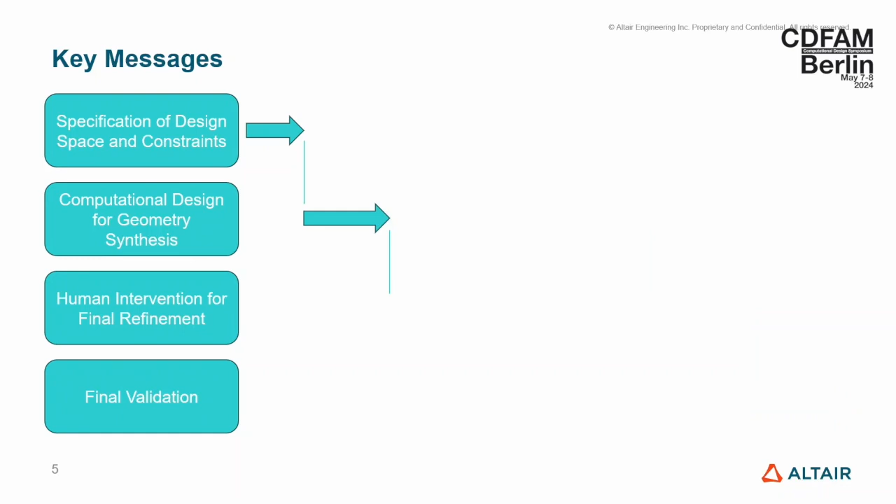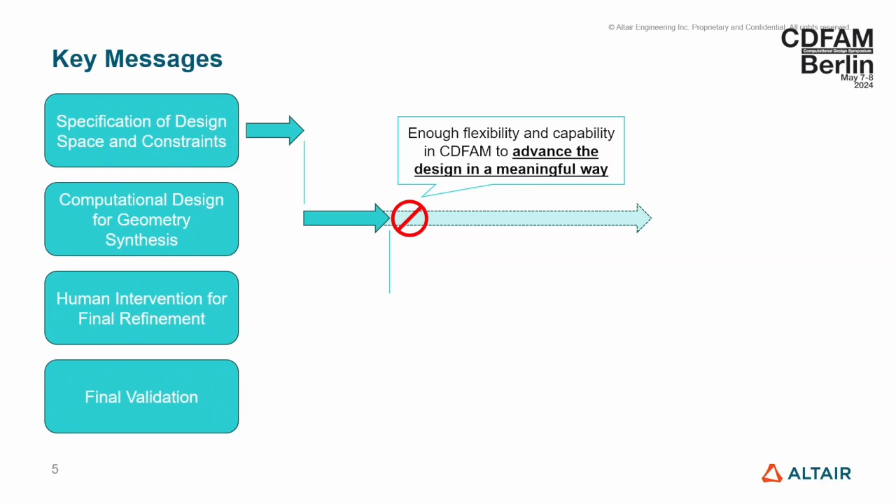However, things aren't always this great. If we don't have enough flexibility and or capability in the computational design part of the workflow, then we don't really advance the design in a meaningful way towards completion. And this can be a real blocker. The knock-on effect of this is we leave an awful lot to do in recovering that geometry to get it to the point where it is manufacturable.

We can encounter another block here, especially if we've leaned too heavily on computational design and we haven't thought about providing those tools that actually get you to the finish line of a manufacturable component. Now, if you don't have the tools to dig yourself out of this hole, you are ultimately stuck. And when you're stuck, the likely knock-on effect is that you need to bring in other software, other capabilities to get yourself out of that problem.

And so ultimately, what we want to make sure we're not doing is taking freedom of expression away from the human designer, and we definitely don't want to get them stuck because we've encouraged them down an incomplete workflow that's heavily leveraging computational design. So again, at a very high level, we don't want to have this hidden cost to our customers and users where they're not just buying one piece of software, they're actually having to buy all the other things that help them get to a completed design.

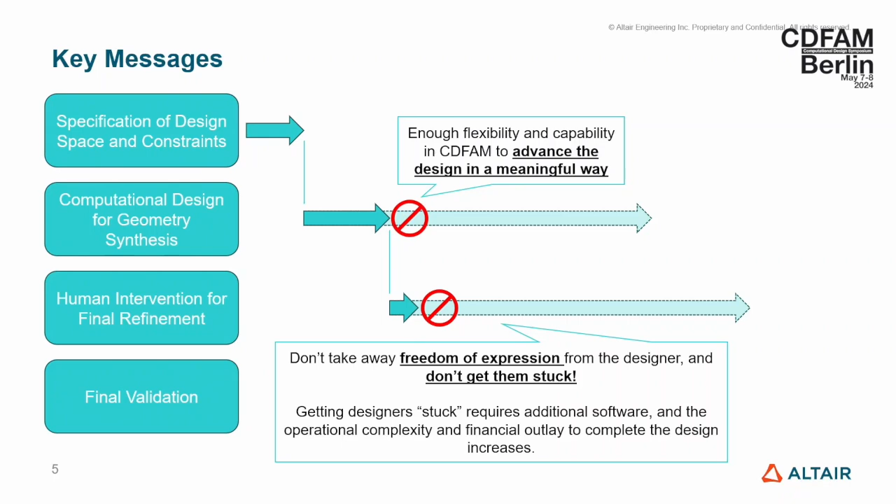So ultimately, this is my personal view, I think it's about balance. We absolutely want to leverage the computer to the greatest extent possible. We can have automation, and through automation we can have speed. If we have speed, then we have more time for exploration, and overall I would say that's a very good thing. However, this needs to be traded off with making sure that overall oversight is still in the hands of the human designer. They're able to operate flexibly alongside the computational design.

And something that humans are still particularly good at, as opposed to machines, is interpretation. So where is that design going? I can see it's trying to do this, but it didn't quite get there. Filling in those blanks that bring you to a complete design when you have possibly 95% of what looks like a complete design. And we want the human to feel like they can be expressive, and ultimately they need to have that control on that final refinement.

So what I'm going to do is just give you some example workflows from Altair Inspire. And what I'd encourage you to think about as we go through this is not just what's happening on the screen, but the way in which we're trying to design our tools to allow the user to operate flexibly and be expressive, whilst also leveraging the power of the computer for computational design.

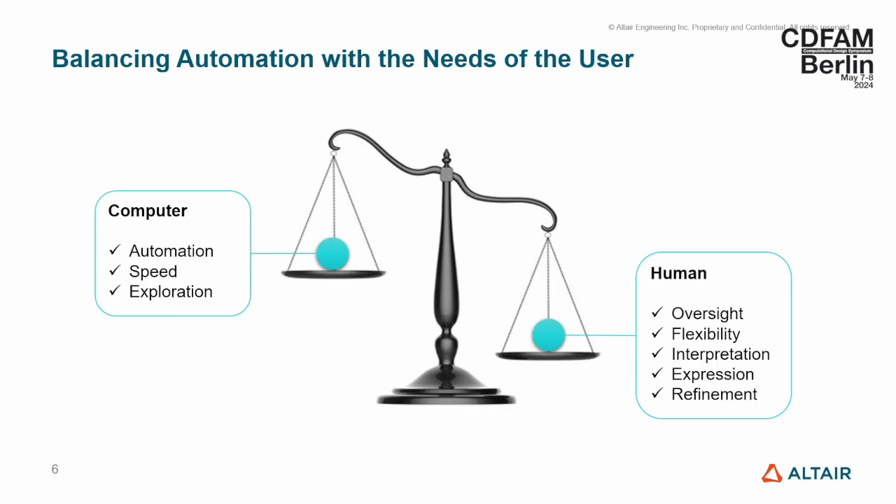So the first of these comes from the field of stochastic lattice design. These are particularly popular in, for example, biomedical applications where, yes, there are structural load cases to consider, but also things like biocompatibility inside the body, tissue ingrowth, and things like that for medical implants. I'm going to show a video and talk over what's happening here. So we start the design with a 3MF file, which we've imported here, of part of a human bone.

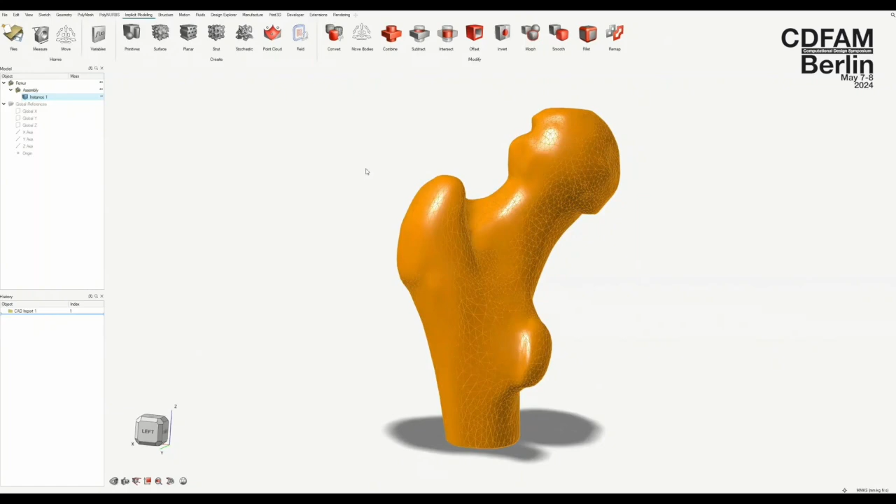This is a femur in this case. I will say I'm not an implant designer. This is illustrative. So we can optionally convert this into a subdivision surface, which makes it editable CAD, but you absolutely don't have to. And then from here, we're going to go into the implicit modeling capability of Altair Inspire and click the stochastic lattice panel.

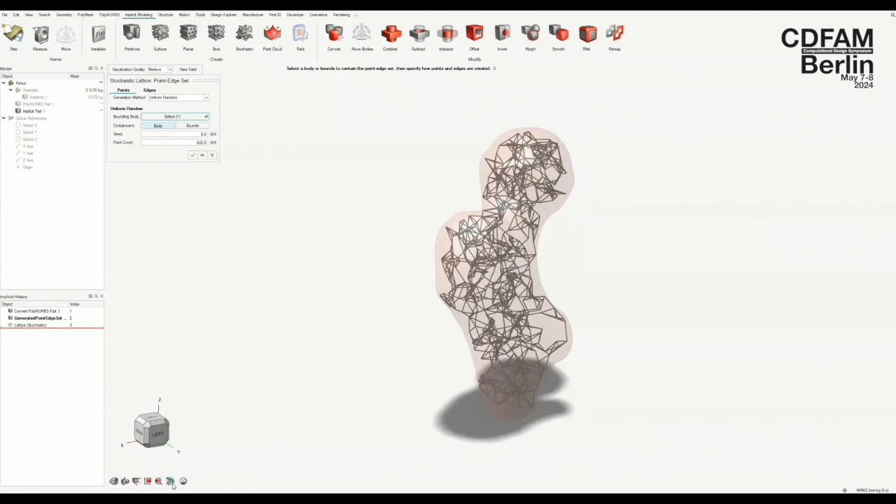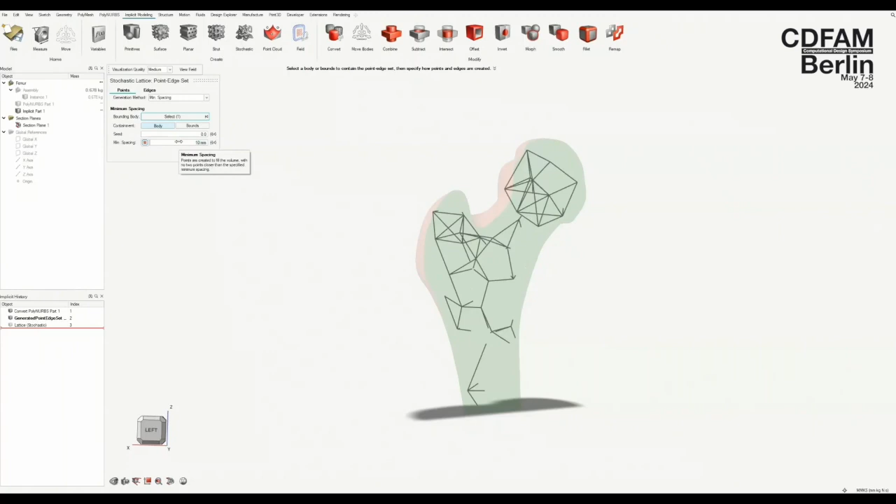So the thing that pops up automatically is actually a load of points that have been distributed according to a rule, and those points are connected by edges, again, according to a rule. So we can edit the way the points are distributed and the number of those points. We can have them randomly distributed or with a minimum degree of separation between them. And then we have different rules for how those are connected as well. So we're just going through different densities of points here. And you can see that filling out the inside of the model.

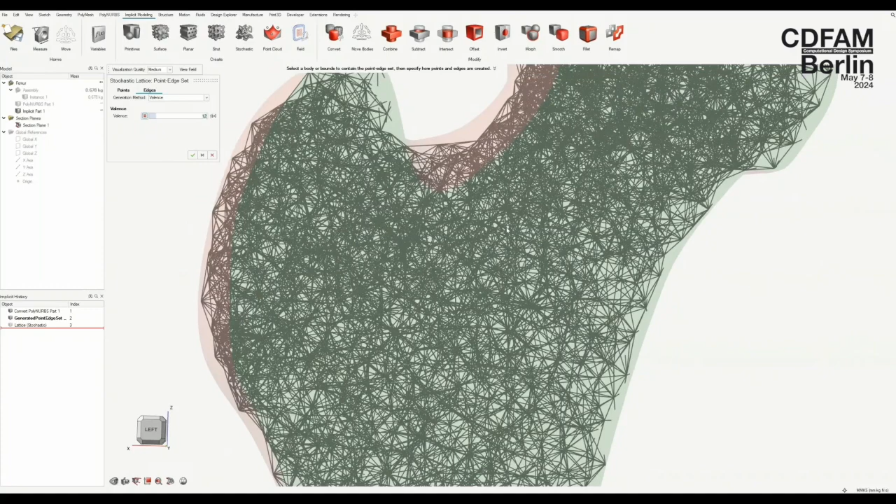And then when it comes to the edges, we can do that by how many of the nearest neighbors you want to connect each point to. Or you can do it by other means, such as the Delaunay triangulation, which gives you quite nice elements throughout the model. Now you'll see that also produces beams that travel outside of the geometry. And what I'm going to tell you now is that's okay, because what we do next is offer all of that freedom back to the user to produce precisely what they want.

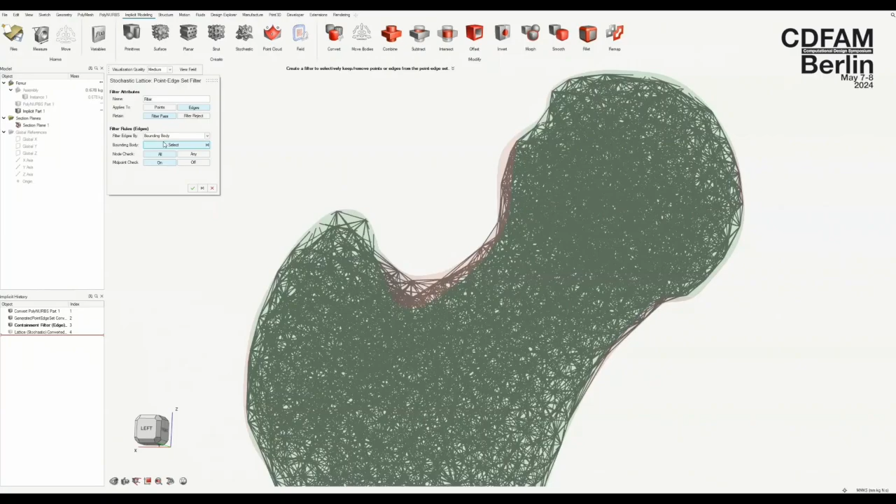And we call these point edge set filters. So we have points and edges that form a point edge set. And then we have filters that you can keep layering on top to decide which points and which edges are included. So by using a bounding body filter, we can remove any of those edges that were traveling externally to the model. And then we can see, as we keep hitting the plus button, we're adding more and more filters. The order of these filters is significant, and you can change the order, and you can tune each of the parameters.

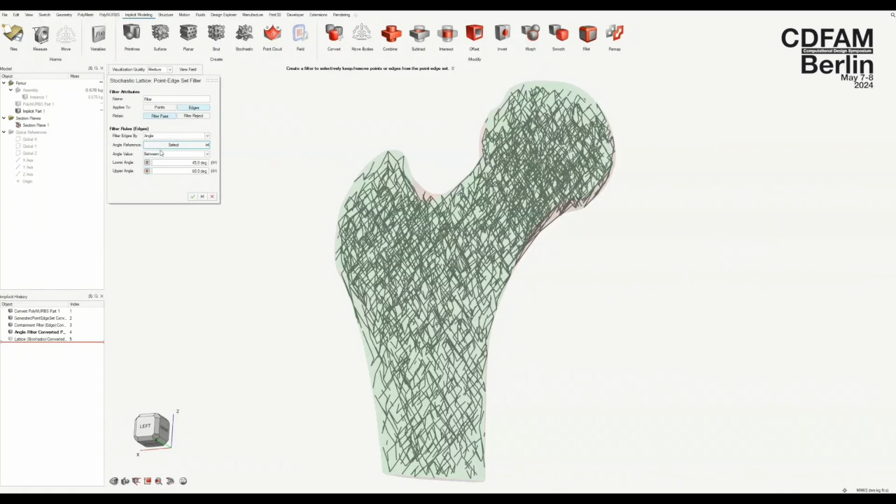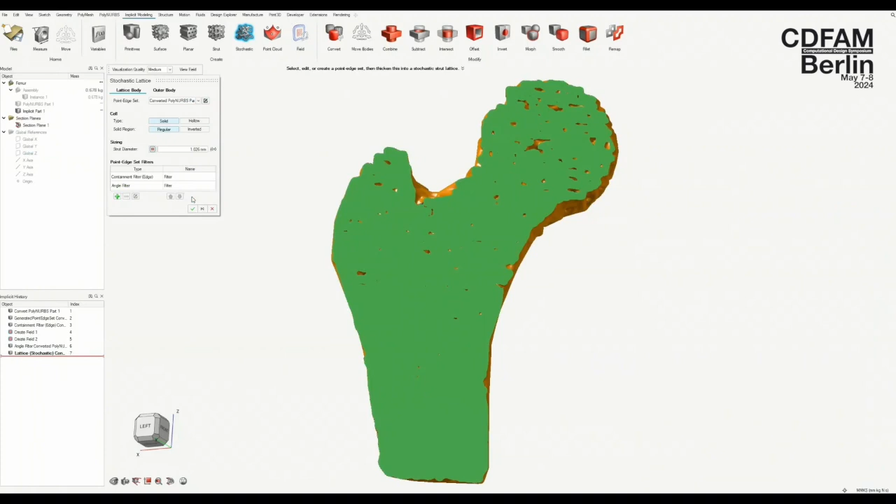So what we're doing here, to try and mimic some of what goes on inside the bone structure in a real human bone, is we're limiting the angle that some of these edges can form with respect to some reference. So as we go towards the bottom of the implant, they tend to be sort of 45 degrees to vertical. And as you move up towards the top of the implant, they tend to be predominantly horizontal or vertical and not much in between.

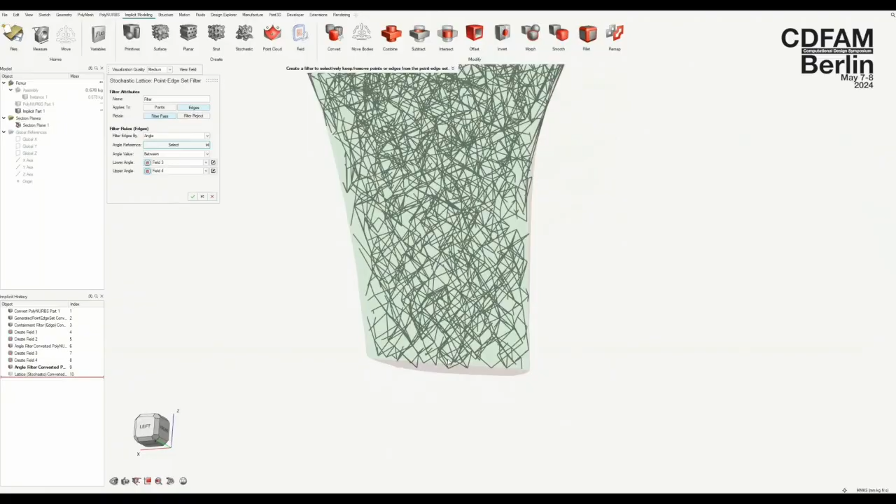Now we're doing that with what we and others call field-driven design. So what we're doing is saying, based on the height from the top to the bottom of the model, change the angle of the edges that you will permit to carry on existing in the part. And you can see as we scroll up a smooth transition between those effects. So with field-driven design, at every point in space, you can control a whole host of parameters in a way that you probably couldn't do before implicit modeling.

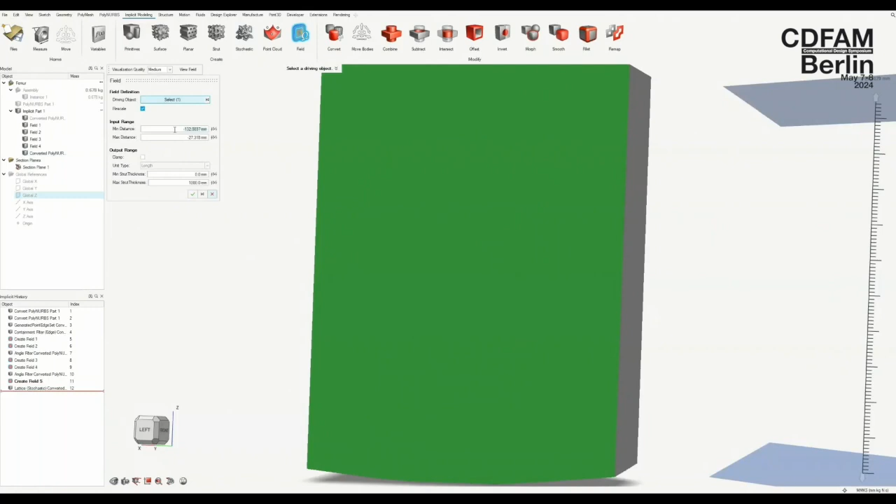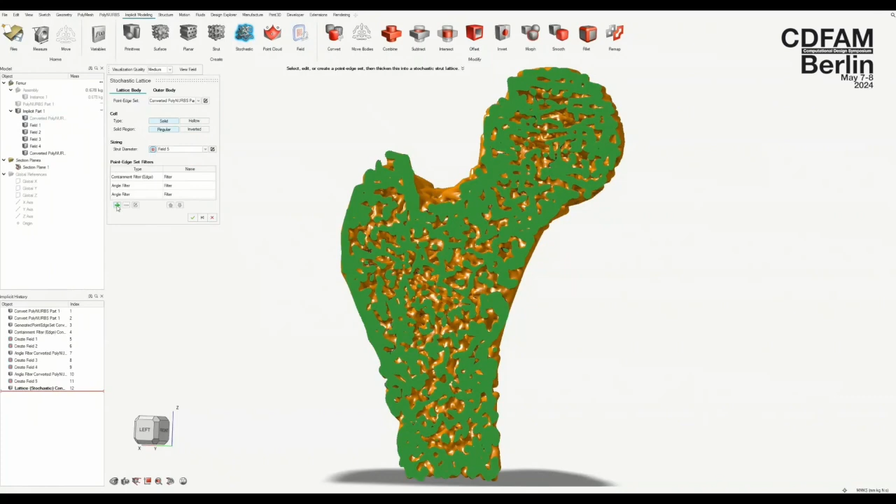What we do now is start thinking about thickening this into a lattice. It had infinitely thin edges before, so we're not unique in this. This is generally the approach taken. But we're also going to put a field-driven effect onto this. So as these beams get closer to the surface of the model, they get thicker, and as they move deeper into the model, they get thinner. So we create a field which represents the distance into the model, and we set the beam diameter according to the value of that field. And you can see that gradient now appearing there in this section view.

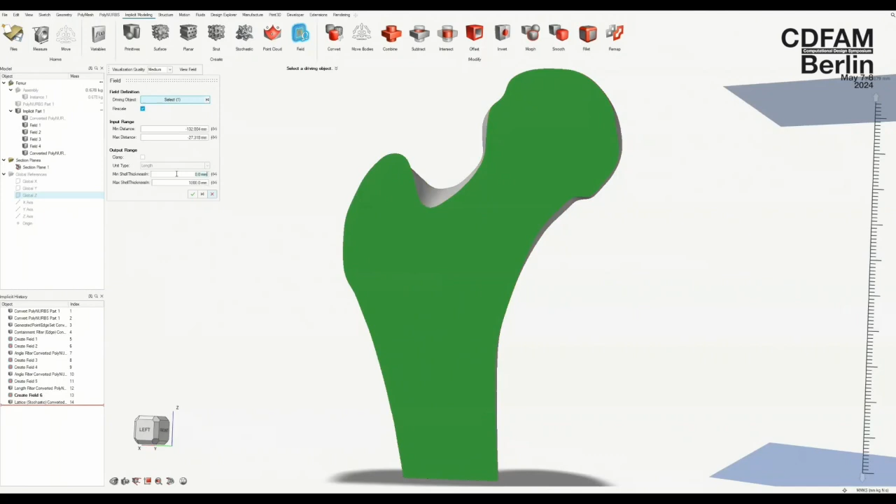We need an outer shell on this as well, which is something we can very straightforwardly add. And again, this doesn't have the same thickness. In fact, it changes all over the place in the model. Now, we can control this in lots of different ways, but for this video, we've just shown it controlled between two horizontal planes that you can see here. So you have a thicker shell thickness at the top, and that smoothly varies down to a thinner shell thickness at the bottom. And it's all completely interactive. You can do this with the mouse and keyboard.

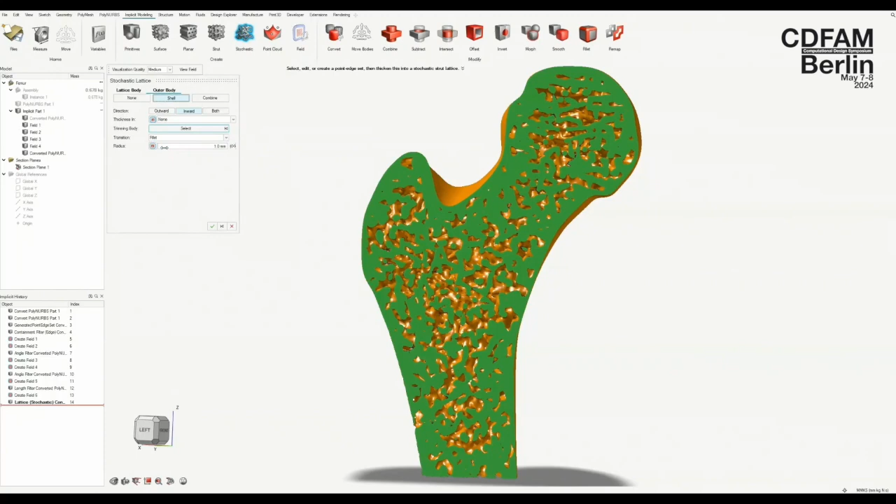And the point here is you keep layering these effects, much like editing digital photographs. I want it to be black and white. I want it to be a bit darker here. I want to change the focus level there. It's the same with the way we're working here. You keep layering your effects until you have precisely what you want.

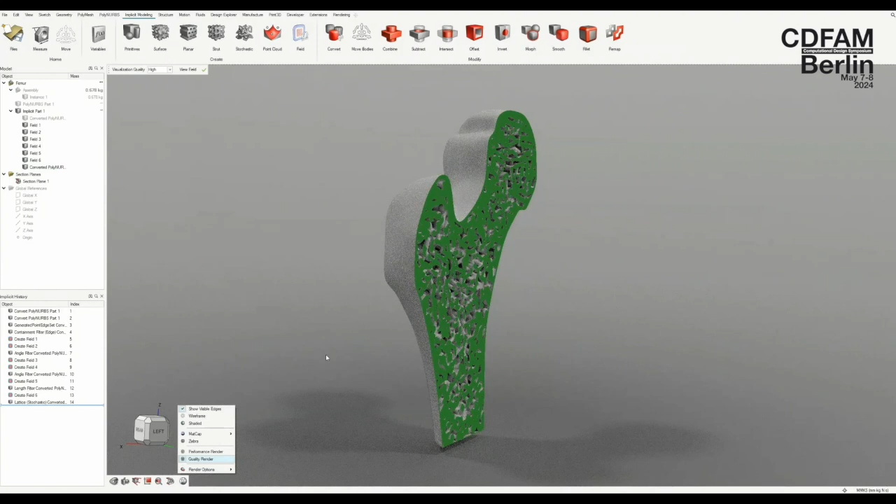Now, in the interest of time, I may skip to the end of this video, which shows this being passed directly into the Altair Inspire rendering scene, which is coupled very tightly with the geometry. We share memory, in fact, so we can render and design at the same time. It's very fast. But the end game is that you produce images that look like this, and this shows a section view of the implant.

So just to review that workflow, we have rules for distributing points, and there's lots of ways you can do that. We have rules for how you connect those points with edges, and then we're encouraging the user to layer these effects to retain exactly the edges and the points that they want. And then we can also have field-driven effects on wall thicknesses or lattice beam diameter, etc.

And there is really no limit to how much you can achieve when you approach it with this field-driven design approach. Fields can be driven from BREP features, from models as a whole, mesh geometry, subdivision surfaces, or even, and you'll see this later, point clouds, which is actually becoming very powerful. So

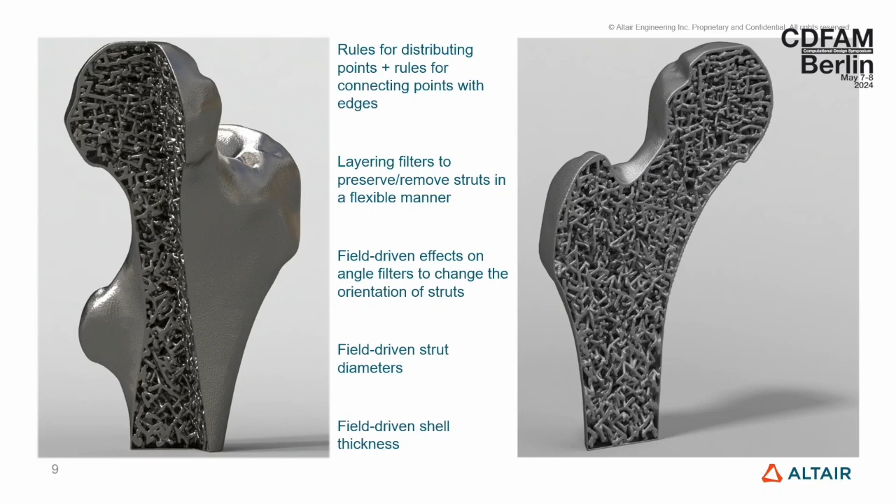that's how you can do it in the GUI, but sometimes we get really strange requests. We had an exploratory piece of work where someone wanted something that we hadn't really encountered before. They were talking about acetabular cups, and this is a sort of hip implant, if you haven't seen one of these before. And this lattice structure here is designed to encourage, again, tissue ingrowth so that the body accepts the implant. But they had some strange requirements.

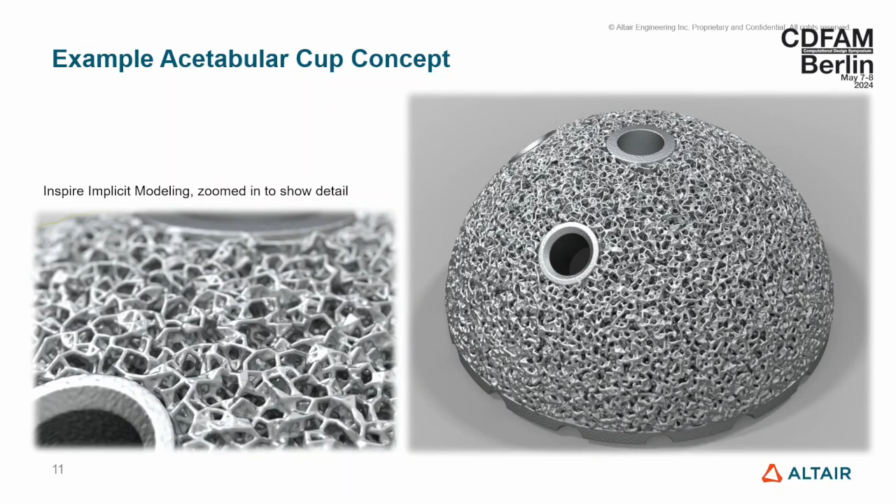Firstly, they wanted to generate these pretty much automatically. And they also wanted to drive it with parameters that made sense to their domain. And those things were things like pore size or open area of these sorts of pores available on the surface, the strut or beam thickness, and then the overall dimensions. That's all they wanted to work with. They don't have a deep personal relationship with a particular lattice type per se. They just want it to be a good implant. So they're kind of doing the inverse design in this case.

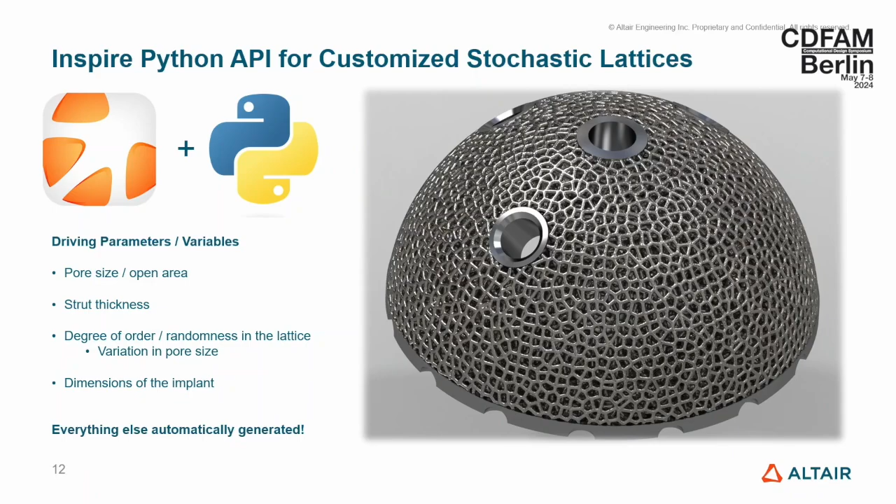And we're quite fortunate in Inspire in that we have a very comprehensive Python API. So when something isn't obviously possible with mouse clicks and keyboard entry, it can be scripted just with normal Python code. Everything that's available in the user interface can be hooked into as a Python script. And the conversation was quite interesting. We had a discussion about whether we could control the degree of order or randomness in these lattices, and then have everything else generated automatically. And the answer is yes, you can.

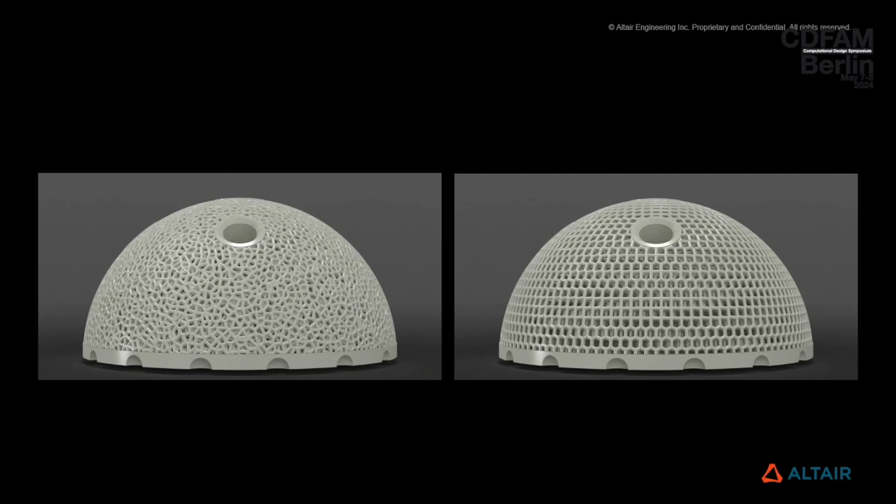So here are some examples where we're going from highly ordered to much more random, all run from the same script, and then we have different target pore sizes for these implants here. Again, all run from the same Python script. So yeah, having that scripting ability is really nice for getting that extra layer of flexibility for the user.

So I'm going to change tack now, and I'm going to talk about topology optimization. Altair is known for a few things, but it's definitely known for topology optimization. And across the product range, there's a wide range of solvers, and importantly, there's a wide range of manufacturing constraints and boundary conditions. And it's really critical if you're going to have a manufacturable design to be able to select the right solver, the right constraints.

Usually, we end up wrapping these in what we call PolyNURBS surfaces. This is a subdivision surface technology, and as the previous talk mentioned, it gives you editable CAD. It's not parametric CAD in the traditional sense, but it is editable CAD, and you'll see that in action in a minute. I'm going to show you some workflows where we use implicit modeling alongside a traditional topology optimization workflow in quite interesting ways.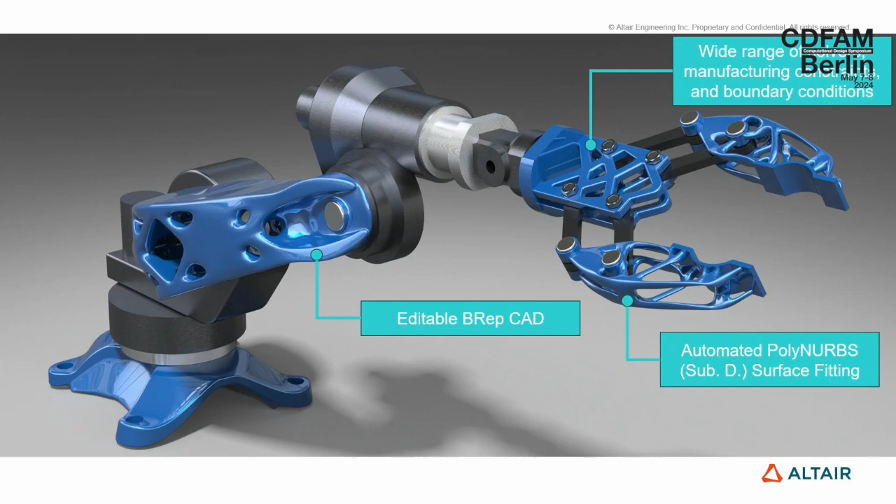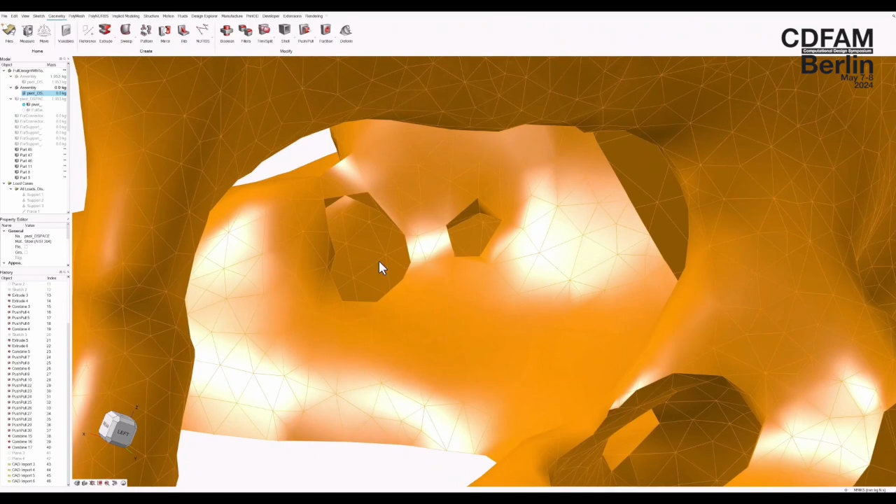And the theme here, as you'll see in this video, this is the original component. This has actually come from outside of Altair. We're working with some of the geometry here. And this is a fairly degenerate topology optimization case. It's done reasonably well. You can see the features emerging, but there are certainly some things that we'd like to improve there. You can see these pores have only just opened up. They should either be there meaningfully or they should probably not be there at all.

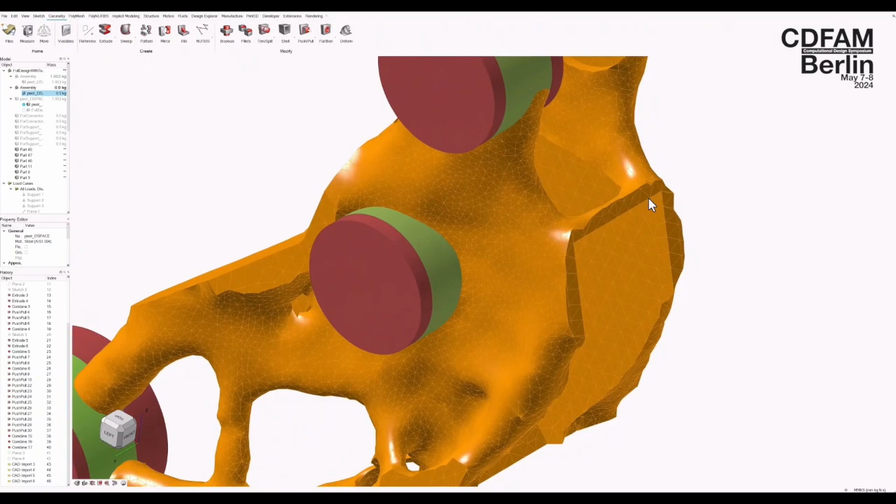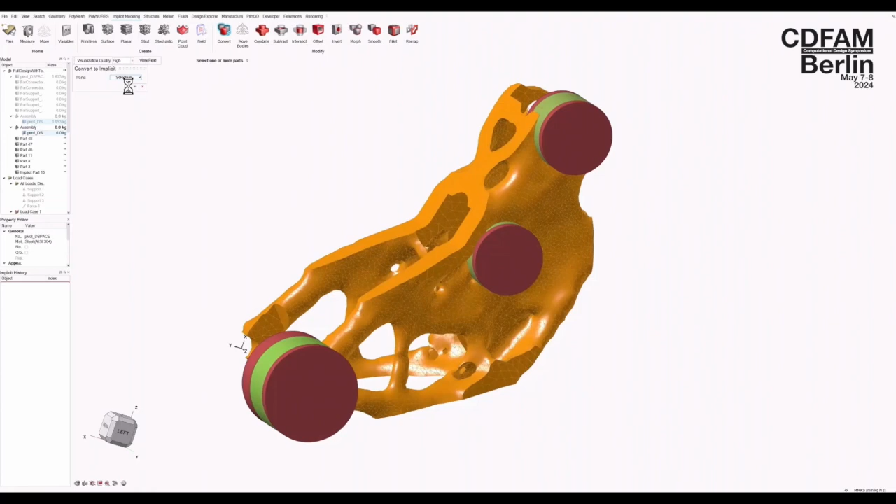Actually recovering this geometry, we call it geometry recovery, recovering this into a manufacturable model can be a bit of a painful process, but thankfully implicit modeling makes some of this a lot easier in my view. So what we're going to do is convert this mesh model into an implicit body. And that just takes a second. We select it from the model browser. And it's a little bit underwhelming at first because it looks more or less as it did before. The key difference is that it's now in an implicit format, and we can do different things with that.

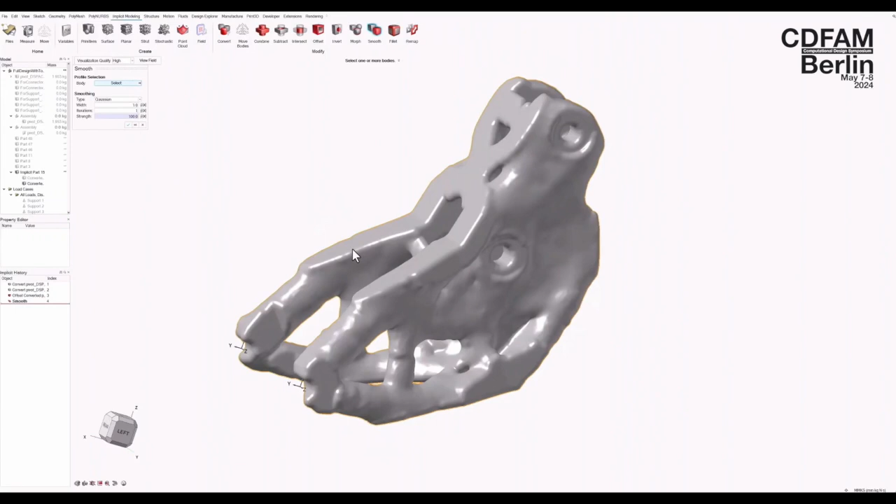As I mentioned before, this is the fast workflow that gets you something quite good quite quickly. We're going to apply a global offset to the model to build out thickness, making some of those very thin, almost degenerate members more reassuring. There's then the possibility to do all kinds of smoothing on that geometry very quickly in implicit modeling, because all of this is computed on the GPU. It's very fast, and you'll see this model turn into a much smoother version of itself.

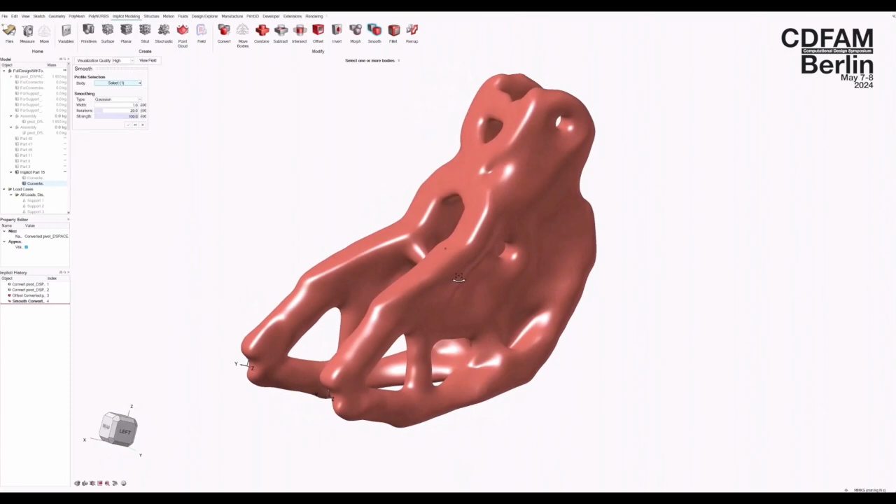To some people, this workflow is acceptable and it's all they want. I don't progress this all the way to the final model in the interest of time. The next example I show will go a lot further, but you could happily progress from this point out to the final model.

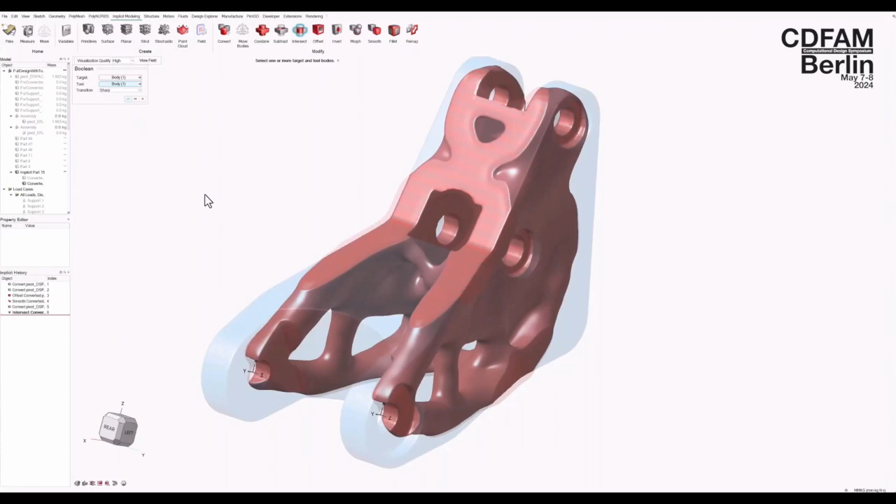I think the final step in this video is reintroducing some of the original keep geometry, the geometry that should be preserved, the bearing surfaces and mounting points, and also making sure no material is moving outside the volume of the original object. It all has to exist in that design space, so we need a nice hard trim so we don't get any unwanted collisions or interference.

I'm now going to show you another workflow, which is slower, I will grant you, but much more controlled. We're going to leverage point clouds, which is something we can use all over the product.

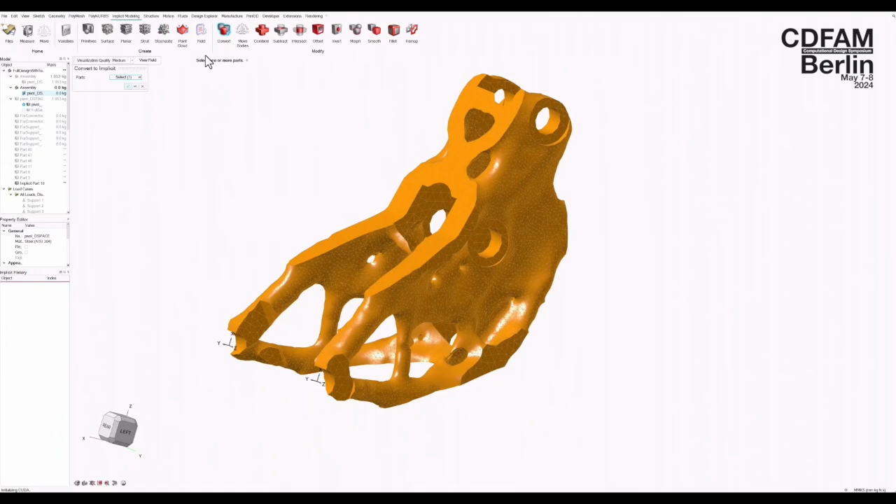So we'll start from a similar position, this is the same model. We're going to do two things: we're going to offset like before, but locally, based on an amount specified at each point in a point cloud. I'm creating the point cloud here so it exists at the right point in history. All of our implicit modeling is history-driven, so you can roll backwards and forwards in time. So we create the point cloud so it's available for use.

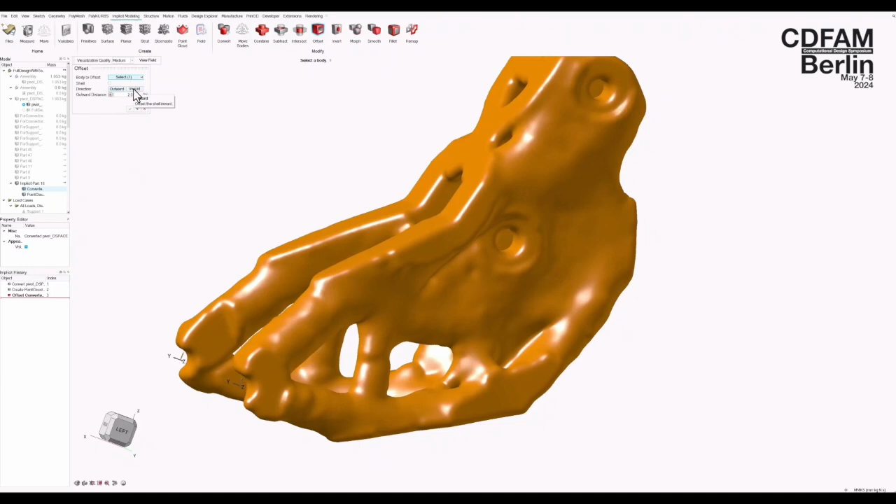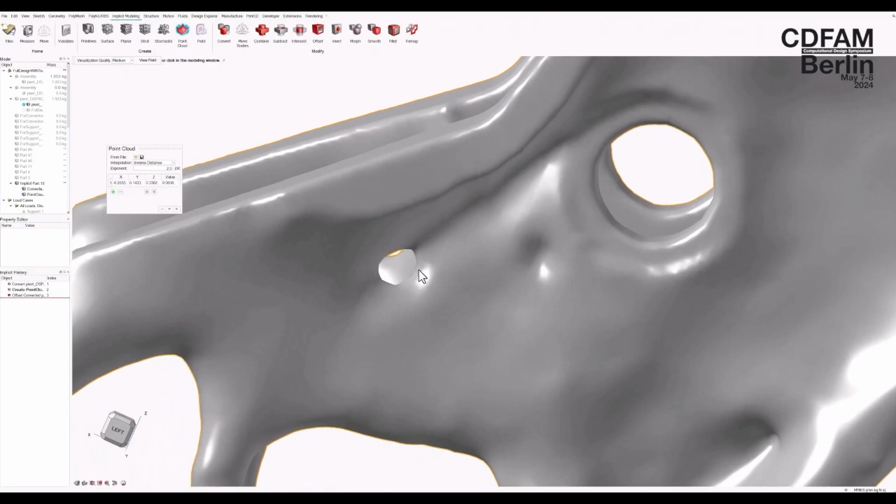I'm back in the offset tool here, and you can see there's no one good global offset value that suddenly makes this brilliant. What we want to do is locally determine where we're going to offset. What I'm really doing here is not trying to get the final design, but rebuild the topology so it exhibits all of the features in a more obvious way, and say yes, that is the topology I want, then we'll go further from there to move it towards a manufacturable geometry.

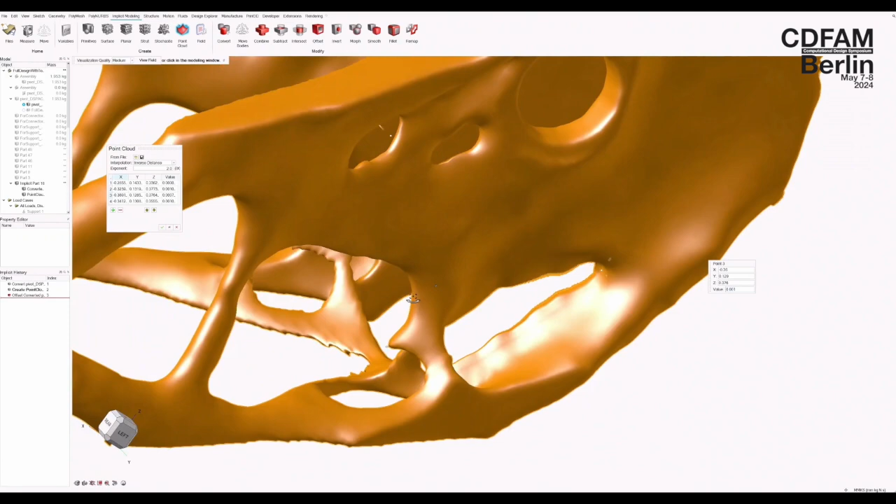I sped the video up a little here in the interest of time, but this is just me working in the software as is. As I place points, I'm also specifying how much I'd like to offset by in that location. Between points, it's interpolating that amount, and we have lots of different ways of interpolating. You can do it based on your nearest neighbor, or have smoother interpolations based on the distance to your nearest points and the influence each one would have.

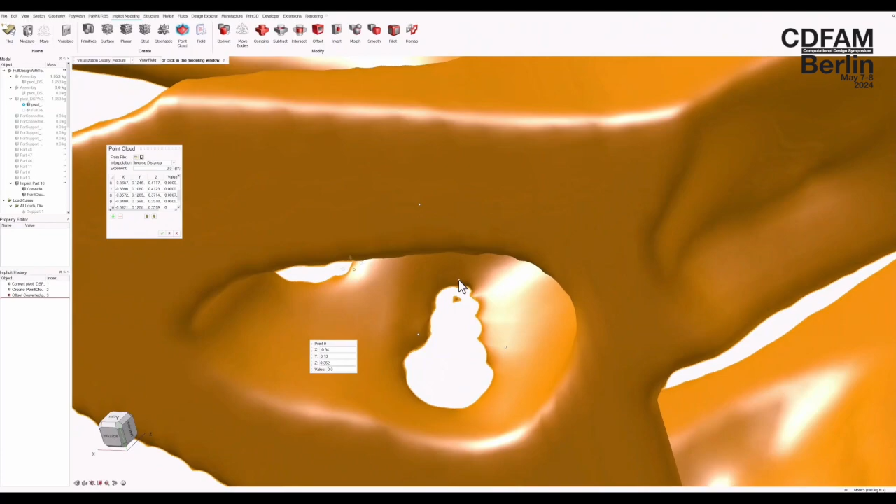After I've placed enough points to reconstruct the topology I'd like to proceed with, this is again focusing on the fact that geometry is often degenerate and you need to do something about it. You can see as I'm clicking through, I'm rebuilding this cross-brace member that became quite degenerate, making sure that pores don't close up.

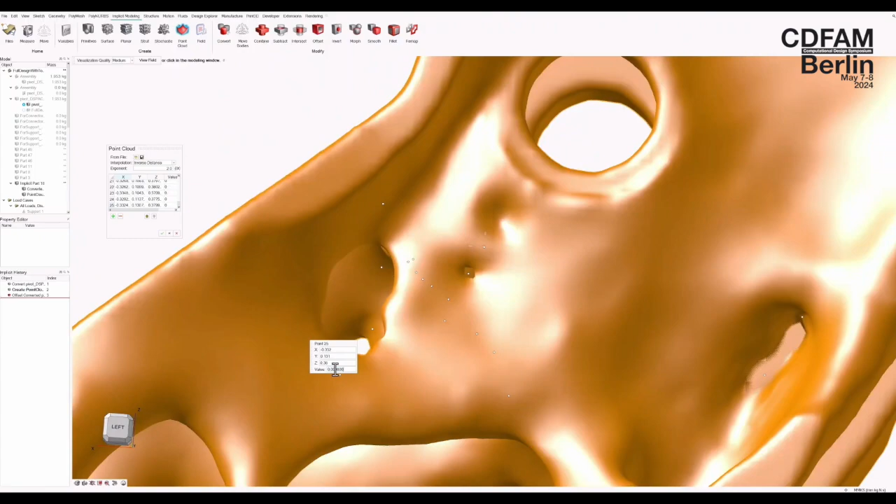As I complete this final cross-brace here, I've decided that's enough now. I've got the topology in a meaningful way, and now I'm going to move to a different tool, which is called Morph.

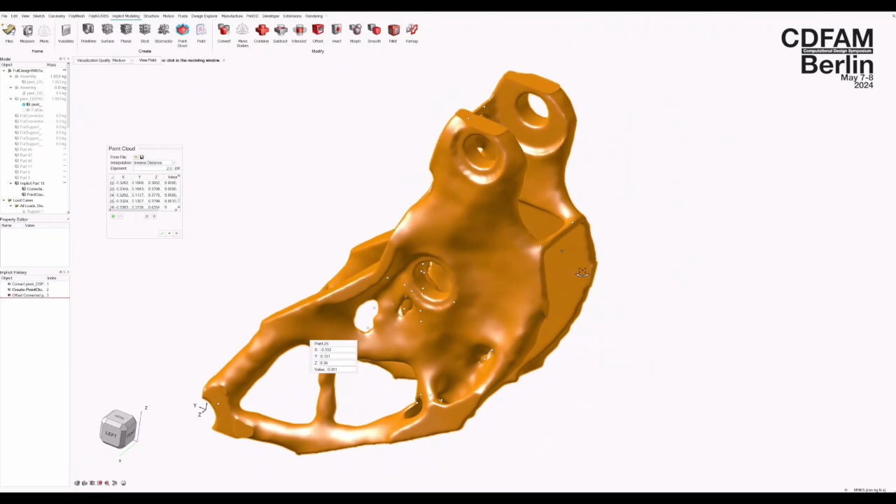Morph is an interpolation. So if you have shape A and shape B, it can give you some variation between those two things using 3D interpolation of the geometry, and that's something quite straightforward to do with implicit modeling.

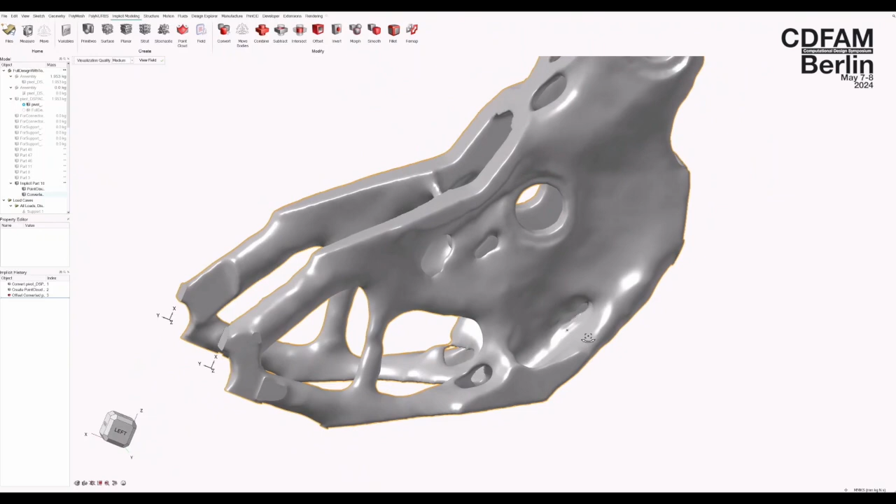But again, I'm going to morph locally. So as I put down points in a new point cloud, I'm saying whether I want it to be more like the original geometry, sharp features, thicker, or more like the thinner geometry I just reconstructed the topology for.

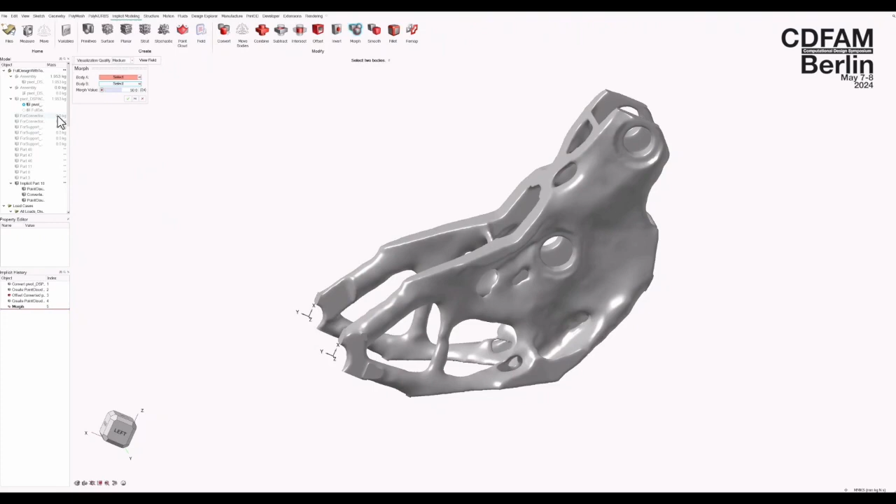This is me just getting the point cloud ready to go. We open the morph tool, and just to give you an idea of how morphing works, I put it to, I think, 0% first. 0% is exactly like the original model, and 100% is exactly like the rebuilt topology from the previous step. I can have 25% or 75% and anything in between.

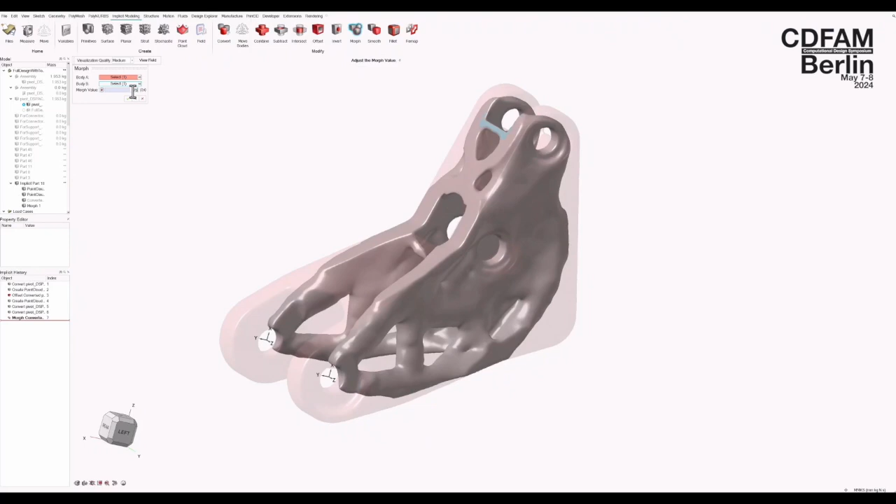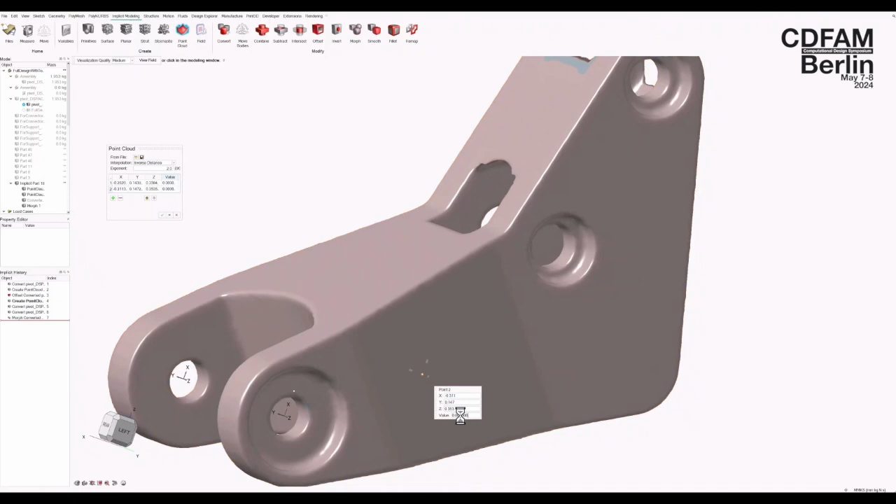But there's no one good global value in most cases. What you want to be able to say is, here I'd like it to be like the thick model, and in another place I'd like it to be like the thin model. As I think back to yesterday's presentation from BMW, if you want to retain a flat face, that's fine. You use the morph to say yes, I'd like to retain the flat face in this region, but in other regions I'd like it to be more skeletal and thinned out.

So again, I'll go through the process. You'll see it slightly sped up just to keep to time.

I think it's sped up by 2 times or something.

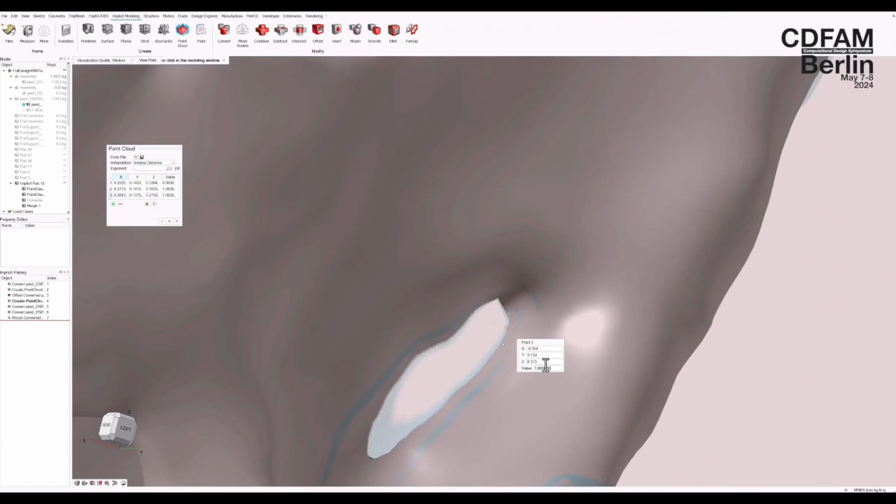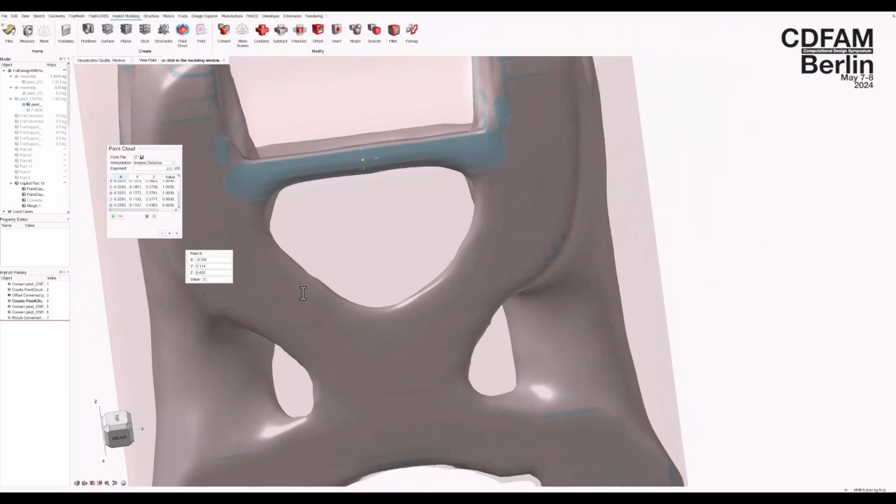This is me putting points in place to say, do I want it to be locally like the thick model or locally like the thin model or anything in between? The geometry will always exist within the bounds of those two extreme shapes of thick and thin. It becomes really quite sculptural when you work this way because you can move the points, change the degree of influence of that point, specify whether it should be anywhere between 0 and 100%, which represent the thick and thin model respectively.

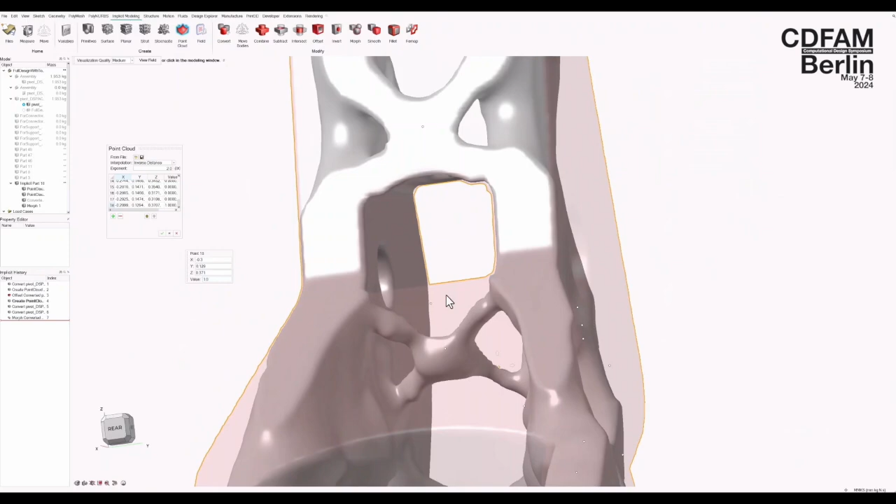You can start being very specific about which areas need to be a little bit thicker or where you want to open up pores a little bit more. You can see I'm recovering a lot more of the geometry from the original in that area just there as I was introducing more points. And as I move those points around, you can see the geometry updates live.

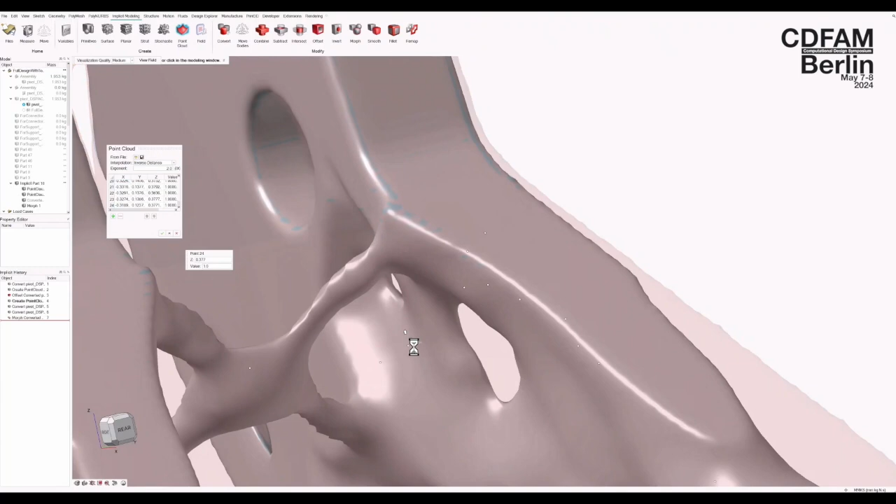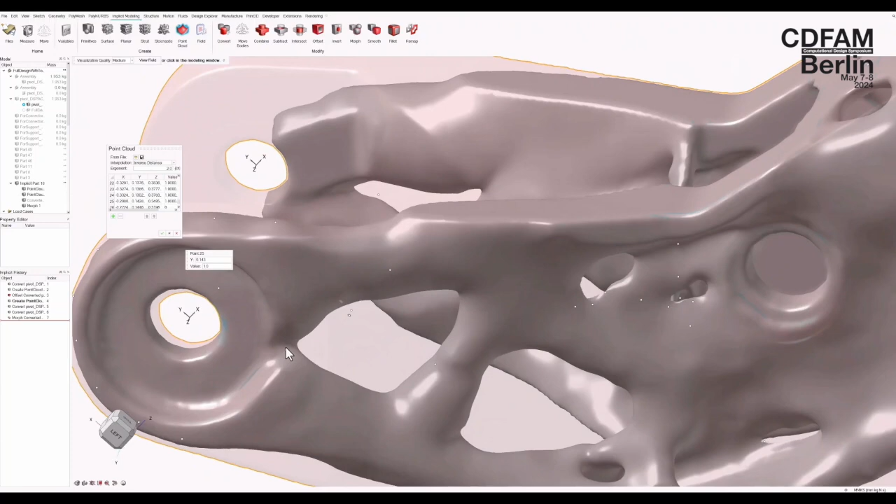Whilst we're absolutely celebrating computational design, and I'm a huge fan of that as a general philosophy, what we're also trying to give is a level of craftsmanship and a level of control back to the user so they can make it exactly how they want it. They're not stuck with 'well, it's kind of what I wanted, but not quite, but maybe I'll just have to live with that.' And importantly, you're not falling into that trap of having to globally thicken the model to make one member more discrete and a bit thicker at the cost of thickening everything else. You can just do it locally.

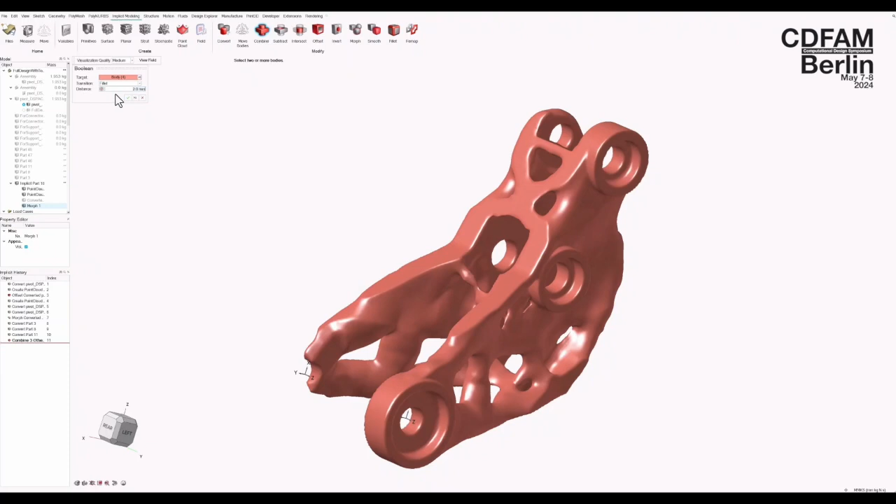So I think we got to the end of distributing points. I probably spent about 15 minutes just editing that to get it how I wanted. I'm sure with more practice it would be a bit faster, but it's not instant - there is an element of craft to it. And now what I'm doing, you'll notice I've only been working on one side of that model as well. It's a symmetric case, so I'm going to, you'll see later, remove one half and then mirror it across.

So part of this flexibility is allowing people to choose which geometry format is best for them as well. I don't believe there is one king of geometry. I mean, I love implicit modeling, I think it's great, but other people love triangles, and other people love quads, and other people love subdivision surfaces. It's not for us to say which is the best. Being able to work across them is really important.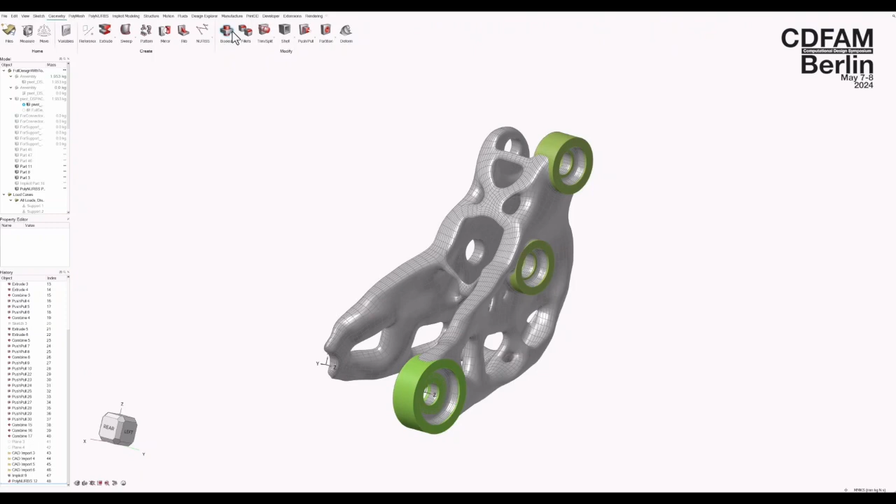So in this model, we've had some implicit modeling - well, it started as a mesh. We've had some implicit modeling to rebuild the geometry we want. It then went to a PolyNURBS surface, which is what you can see wrapped to the topology optimization. And now we're introducing some parasolid B-rep components, and that can all get joined together for the final model.

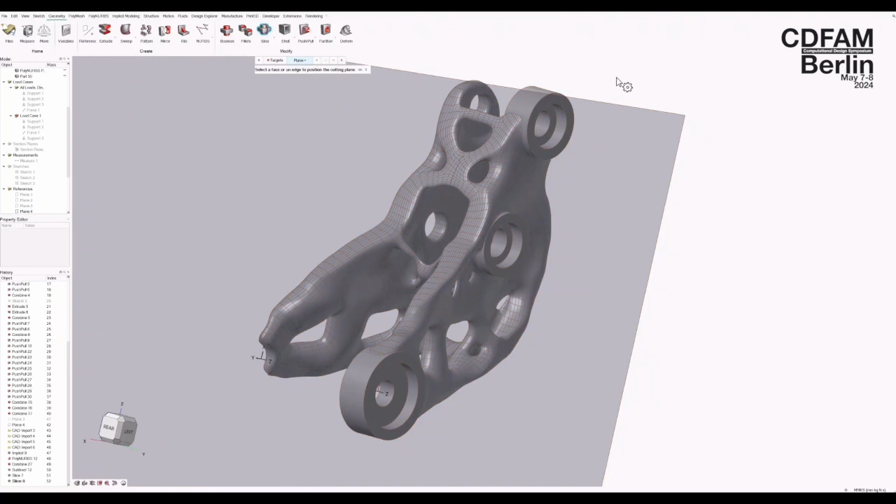Now again, this is for demonstration purposes only. You can take this as far as you want. I think the important message is that the flexibility is there to get precisely what you want, and offering users the tools to work alongside and edit what is coming out of the computational design synthesis.

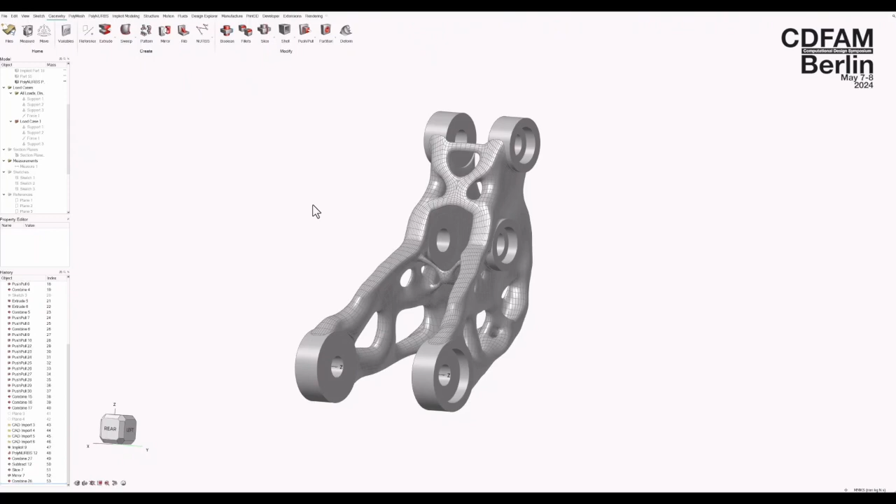So the last few seconds of this video are just showing this in the rendered view. I think we all know what a render looks like, I won't waste your time with that. And I'll move on to my closing statements.

So I think it's really important, and I hope some of you agree, that balancing automation with flexible and expressive design tools is ideal. We do want automation, speed, and exploration that's given to us by computational design. But we also still probably want overall control in the hands of the human designer, and we want that to be an agile, nice way to work.

Flexibility comes in different forms. You can design your user interface to allow users to layer things more and more until they get what they want. Or flexibility can come through custom scripting, and we found that both have been effective for our customers.

Implicit geometry is great and really powerful, but I think it's at its best when it's a complement to some of the other geometry formats and some of the workflows that come with that. Being able to happily go between them and have them working together is a great enabler for design generally.

So I've shown you topology reconstruction and many of the field-driven effects that you can get in Inspire implicit modeling. And I'm going to stop there because I'm conscious it's lunchtime. Thank you for listening. Please come and talk to me afterwards.